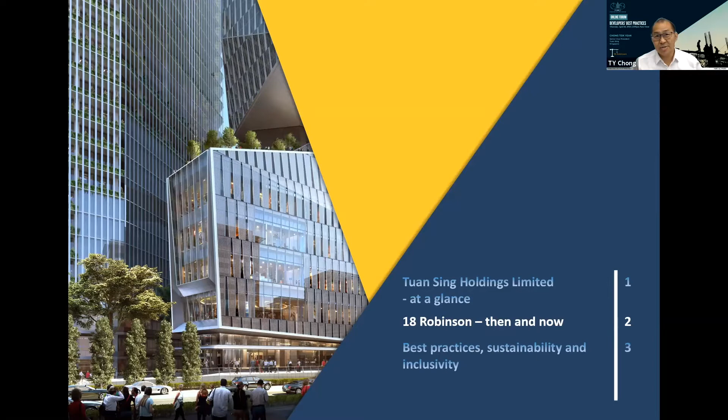In 2011, we perceived that a remarkable change was about to take place along Robinson Road and that it was time to consider redevelopment of the site. With the addition of the development along Marina Bay, Robinson Road was no longer at the edge of the city, but a part of an expanding center close to Raffles Place and the traditional buildings of Tanjong Pagar. We then took a conscious commitment to develop the site by moving away from the present and look to the future demographics, combining work, live and play in the program, sensitive as always to sustainability and inclusivity.

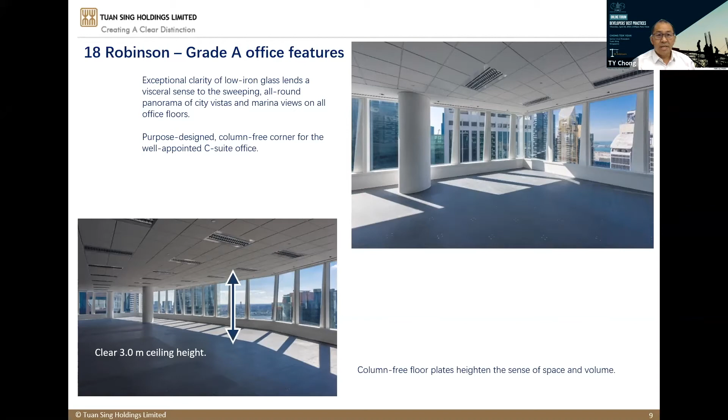On this slide, we show you the interior office spaces. The floor plate is purpose-built, purpose-designed for column-free corner for the well-appointed C-suite office, as you can see on the top right picture. I'd like to draw your attention to the exceptional clarity of the low E, low iron glass that we specified. For the viewer, the clarity of the low iron glass heightens the visceral sense of all-round panorama of the city vistas and marina views. On the bottom of the slide, you can see that all office floors have clear ceiling heights of 3 meters and column-free floor plates.

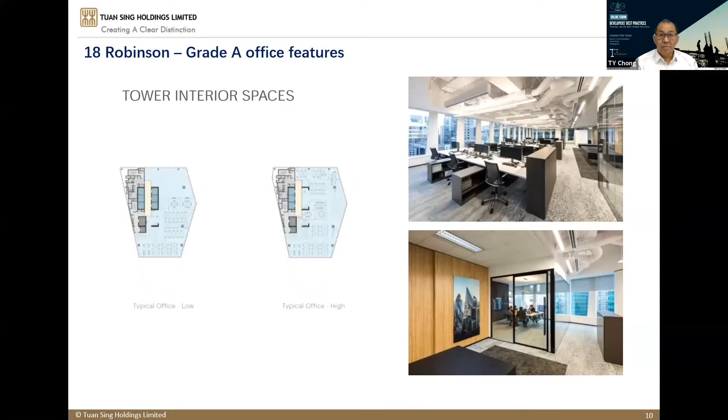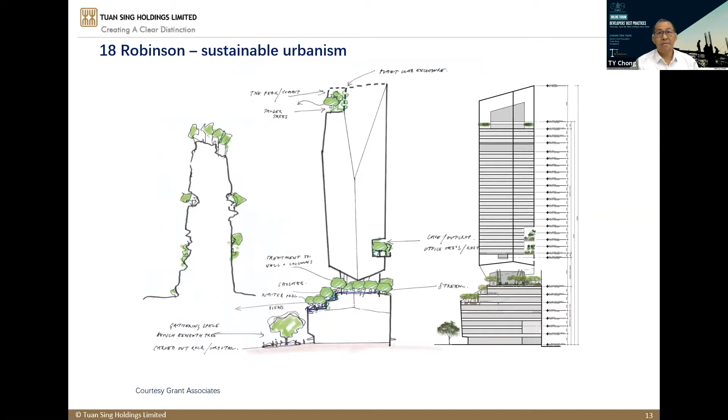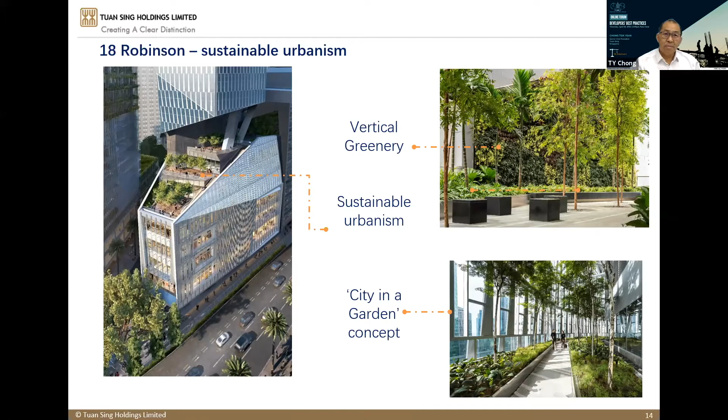And this is evident in the fresh approach we have taken. As you can see here, the element of green spaces threaded through the tower has helped to create a building that feels very much of Singapore and gives a wonderful tropical expression to 18 Robinson. We hope its success will lead others to follow in our path. More so, we believe it is a contemporary best practice on sustainable urbanism.

And the next feature I want to share with you is the novel engineering strategies which we took to overcome the challenges of the site. Briefly, as you can see on the slide, 18 Robinson comprises three parts: a 20-story office tower hovering over the podium, supported by only 2 mega columns and the core; a 7-story retail podium, including F&B offerings at grade; and an underground 6-level basement, which contains a fully automated mechanized car park system.

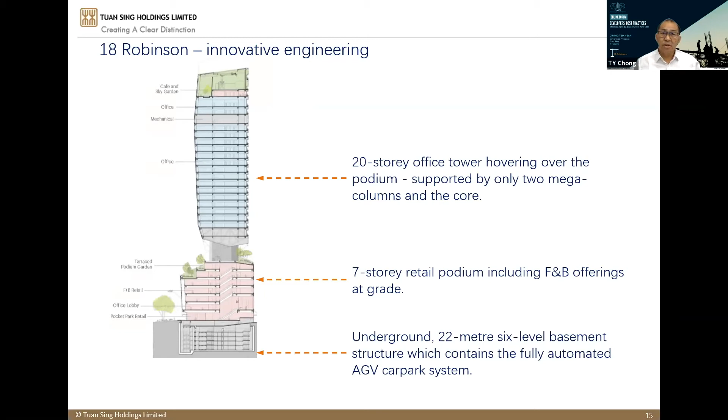The site is extremely congested, as you can see on this slide taken in March 2015. For scale, the compact site is approximately 2.5 times a tennis court. And on this compact site, we have a foundation system comprising a diaphragm wall system, barrettes for the mega columns and lift cores, and bored piles. This complication requires different sets of piling equipment to be choreographed on the site when carrying out the installation of the diaphragm wall, barrettes, and bored piles.

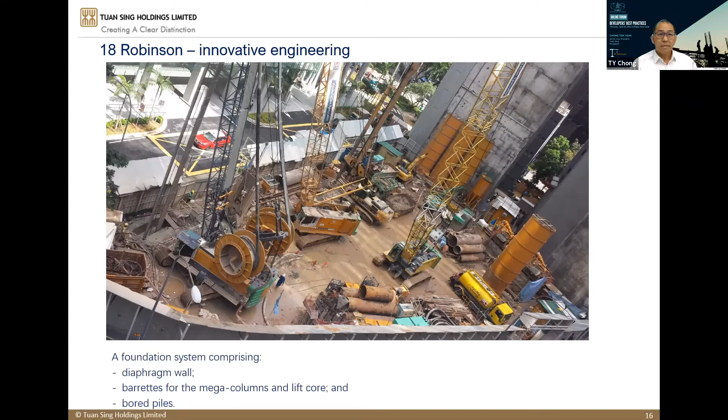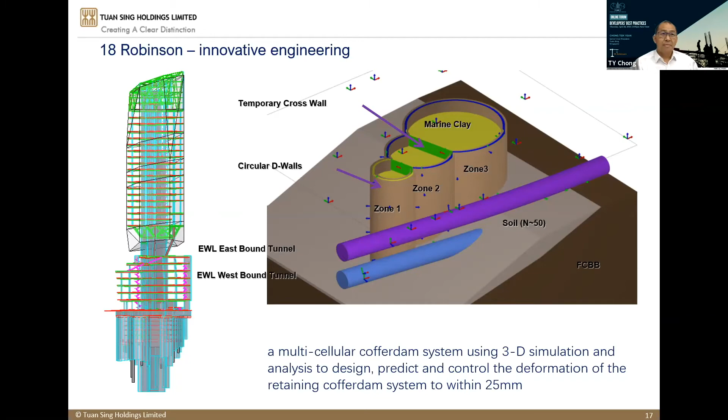The multicellular coffer, we call it the snowman, is extremely robust because it distributes the ground forces within the ring structure and allows strut-free excavation. We turned this engineering challenge to our advantage. With this robust coffer system, we were able to incorporate a top-down construction sequence, which allows us to construct the basement and the superstructure simultaneously, a time and cost-saving initiative.

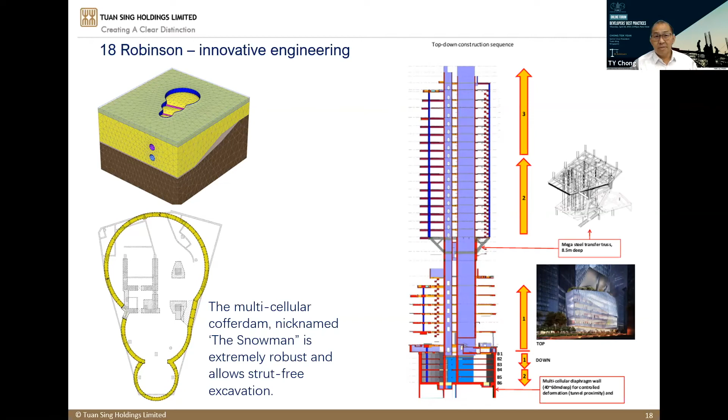In the event, the main contractor benefited from this top-down construction sequence, and we shaved off 12 months in construction time. When the basement was completed, we were at level 19, which is 2/3 of the building height. I hope I can still hold your attention so far, and I shall next touch on a special one-of-its-kind car park system in Singapore, in this part of the world. This is the first in Singapore and in East Asia.

It is a fully automated mechanized system using automated guided vehicles, AGV for short. We are proud to say we are an early adopter of AGV. The AGV can be likened to a robotic valet, which takes over the parking and retrieval of a visitor's car. The system is battery powered, and this certainly has the advantage of zero emission operations. I'll now show you a clip of its operation in 18 Robinson.

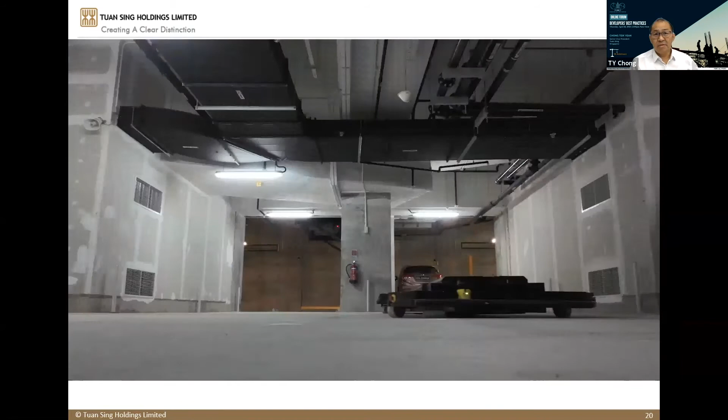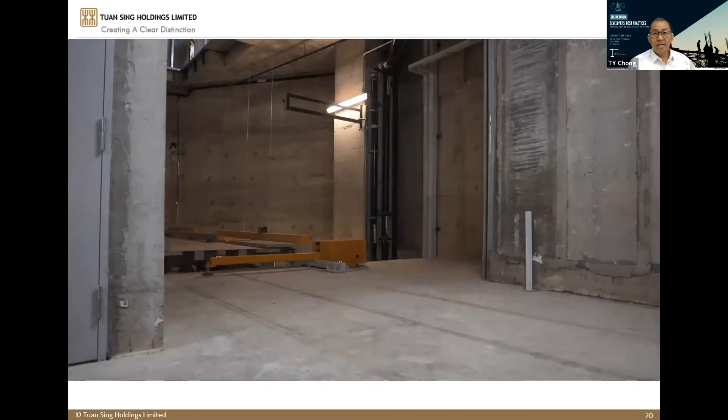Here you see a car arriving and entering the car lift, and a fully automated system takes over and brings the car to the basement level with no human supervision. This is the AGV, the robotic valet, proceeding to the car lift. It proceeds to draw the car very gently out with precise control maneuvers, all the way mechanically without fuss, to safely dock the car onto a parking space, just like this. Very clever.

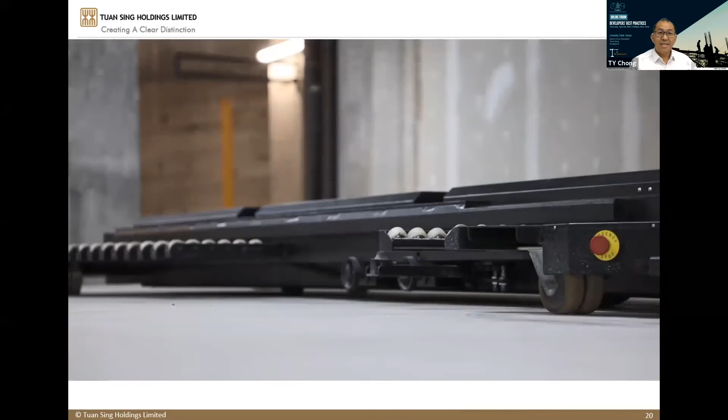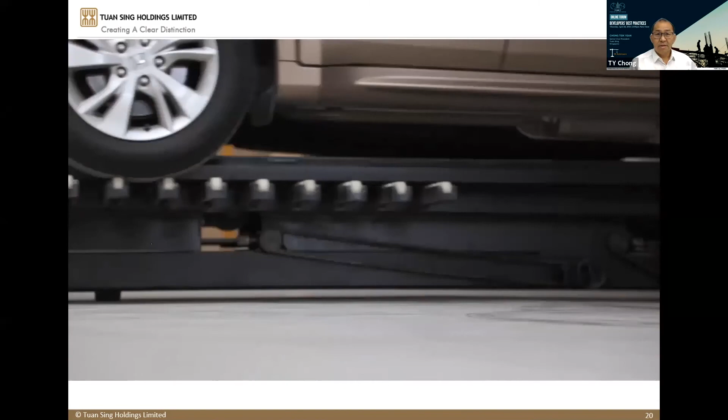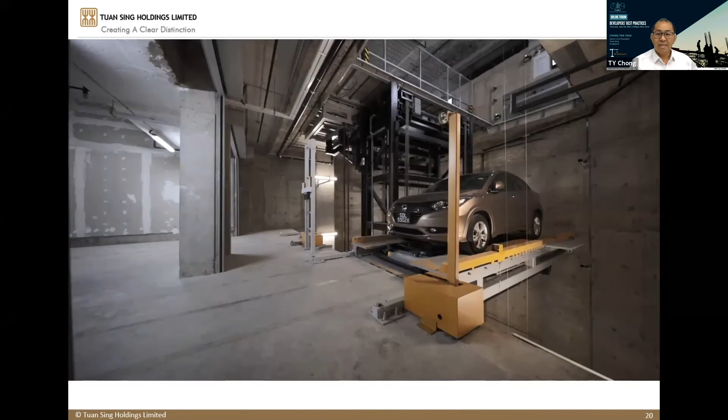Now the next sequence shows the retrieval of the car, and this is activated from the car park panel at the drop-off by the user. And this is the close-up showing the mechanics of the system. It's quite interesting, a state-of-the-art automated mechanized car park system. Again, with precise control maneuvers to bring the car into the lift. It goes around very fuss-free, no human intervention, straight into the car lift in a manner like a valet does. It brings it up safely to the top, to the car owner.

All this contributed to 18 Robinson being certified Singapore's Green Mark Gold Plus. We estimated savings of $500,000 a year, and the payback for the commitment is approximately 6 years. Moving on, we consciously incorporated universal design principles at the outset.

Beyond code compliance, we developed an app tailored for 18 Robinson operations, which provides at your fingertips a visitor management system and tenant registration, directory information, a virtual access card on the app, and very importantly, an interactive wayfinding menu developed to include users with visual impairment. The app integrates the lift, turnstile, and car park systems, providing seamless workflow within the building. You can call this a smart building.

I would like to share an interesting observation arising from this exercise. Unlike Google Maps, where navigation guidance is turn left, turn right, for the visually impaired the convention uses the clock face to give accurate direction prompts. You can actually download this app onto your mobile phones.